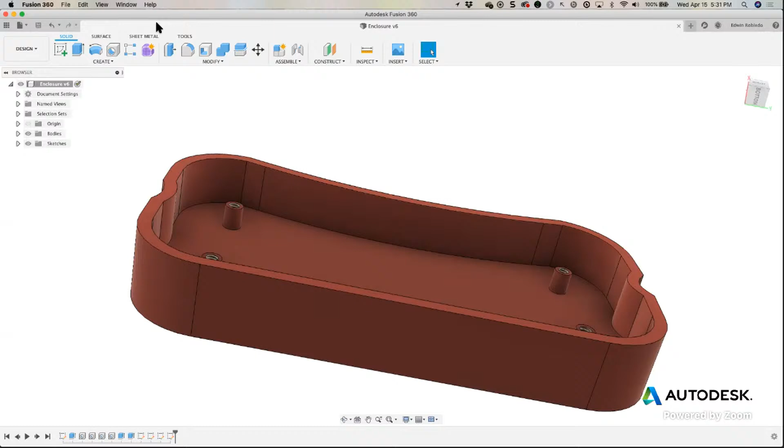I'm going to show you this example really quick, so you could see this workflow where I'm primarily using the fact that the PCB enclosure is actually leading the circuit board design shape. So I'm capturing the enclosure and taking that over to my circuit board.

How does this process usually begin? Let's say this is just your standard enclosure. I tried to create something with a couple of odd corners, because drawing this in the circuit board 2D PCB wouldn't be as easy, even though we do have splines implemented. But how do we transfer this data exactly what we need from the enclosure over to the circuit board? It's best to be as accurate as possible.

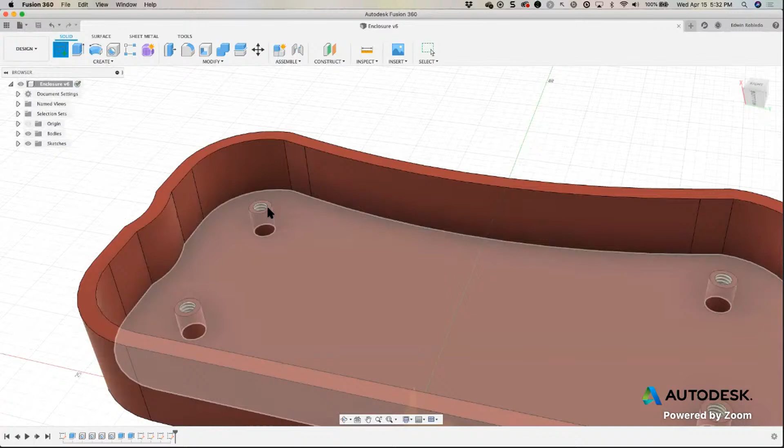The process starts using Fusion 360. I'll select that I want to create a sketch. The first thing that's always asked when you generate a sketch is on what plane you want to draw it on. Since I want the circuit board to sit on the standoff, I'm going to select this plane here. With that selected, I'll click Finish Sketch. I just wanted to set up the plane.

Now, with the plane selected, I'm going to go ahead and click Create PCB.

Hey Ed. Yeah, something happened on YouTube. Let me see. Okay, no, it's okay. I stand corrected, but I said it was just behind or something. Continue. Okay, very well, George. Thank you.

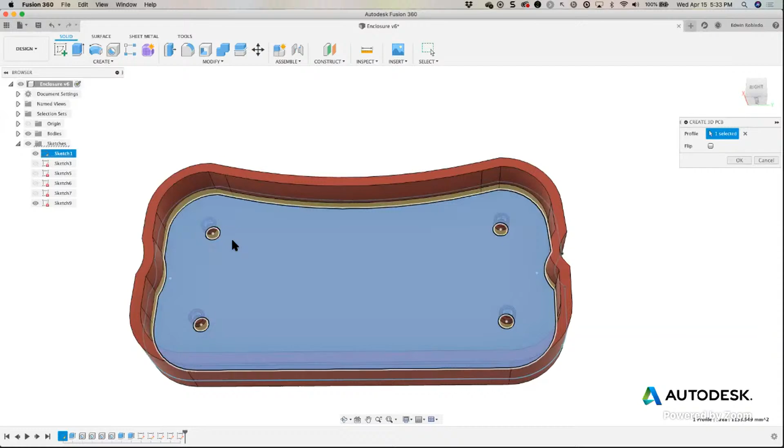Okay, so now I click on Create PCB. Now I'm going to select the profiles that I'll actually be using for my PCB. I'll select this profile we have here, which is going on this plane. But I don't want the entire standoff to come through, only the small part of the standoff, so let me select these portions here.

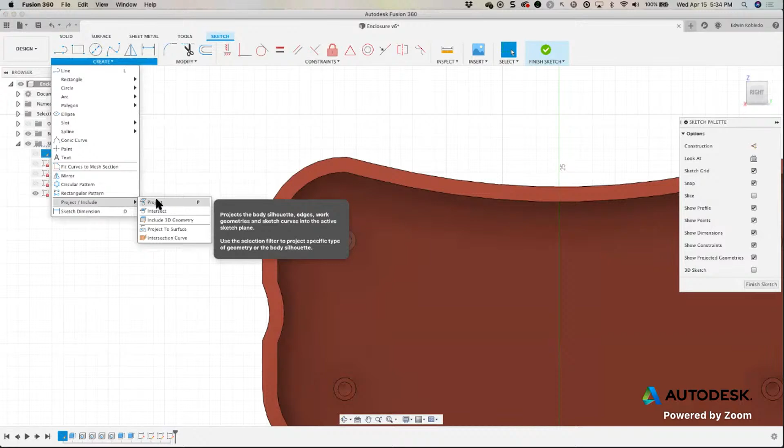One second, let's go ahead and cancel this out. I want to project this bottom here. This is the projection I want to do.

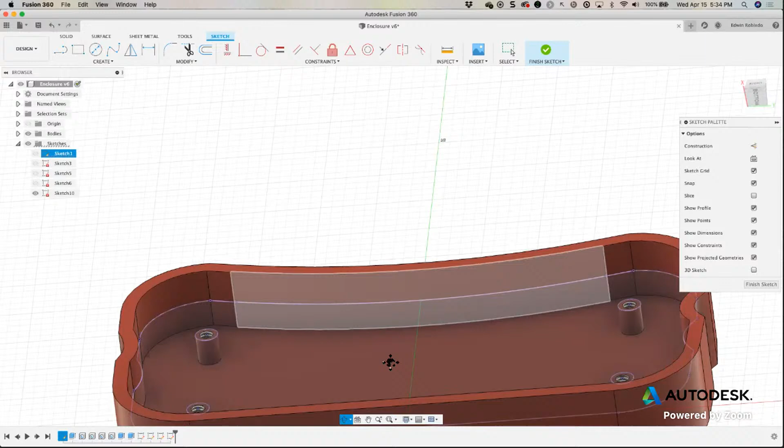So that's my projected sketch. I'll finish the sketch for now, and then click on Create PCB. Now I'm going to select the profiles that I actually want to project for my PCB. I select that one there, and I want to select these — I only want the outline of the hole of the standoff.

I had to change resolutions because it wasn't allowing me. It was a little easier when I was using a higher resolution. It's selecting the entire body, which I don't want — I only want to select specific parts. Let me go ahead and try this one more time. Let me edit my sketch.

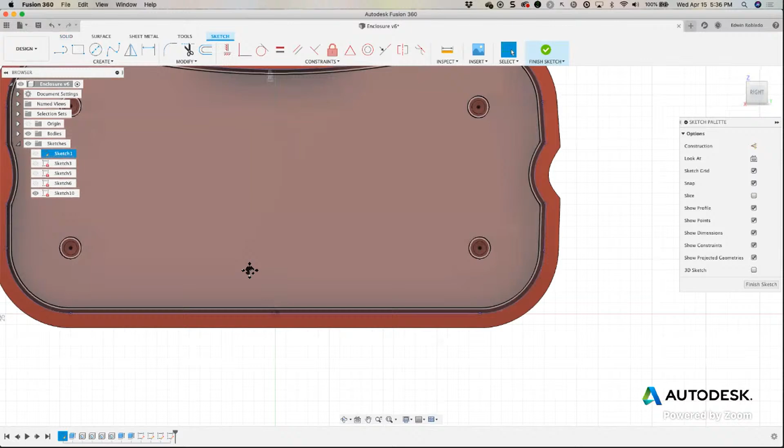Let's go ahead and project one more time, so that I only project these bodies here that I want. I only want these outlines — that's what I want projected as well.

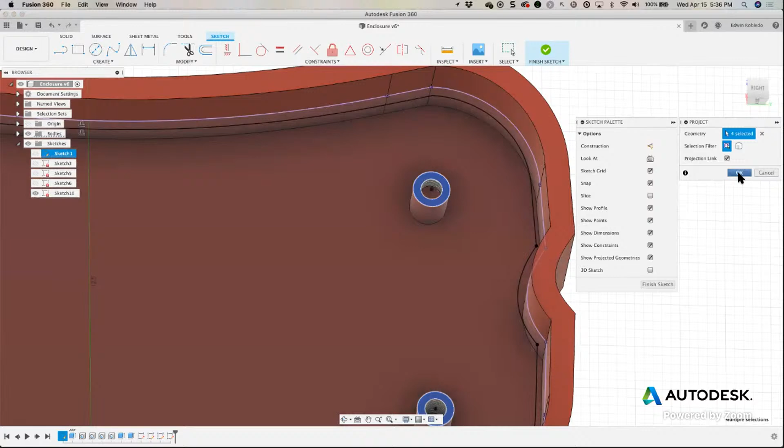You know, George, we always practice this many times, and when you go live, it's just the way it happens. Okay.

You're saying to click and keep the button down until the submenu appears, where you select the profile you want. Okay, perfect, will do.

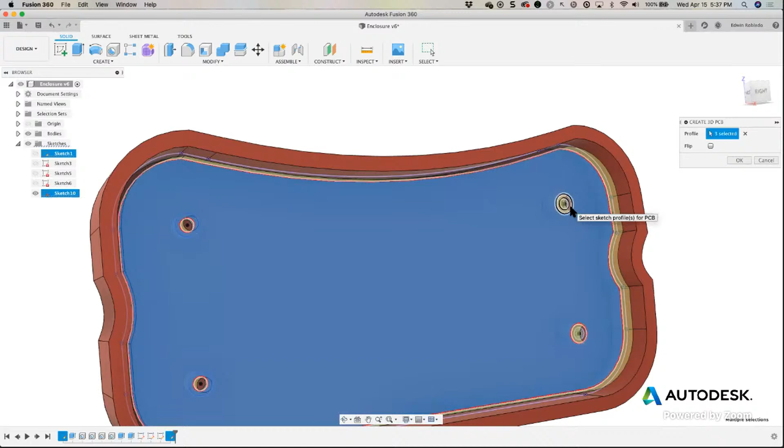There it is — so here's our circuit board. As you can see, what happened is I went from the profile, after capturing it and creating the 3D PCB, it created what's called a 3D PCB. So now we have the circuit board, and you can see that it automatically adopted the contours that I had on that circuit board.

To draw this on the 2D PCB would be a bit of a challenge. Therefore, by just projecting the outline, this makes it a lot easier. Let me just go ahead and show what we have so far.

Okay, I'm going to be using this on my circuit board. Let me go ahead and create a brand new electronic design. I always start with an electronic document. The importance of the electronic document is that it ties everything together - it's what keeps the circuit board, the schematic, and the 3D PCB all working together.

From here, I'll go ahead and save what I've done so far. It adopts a name, electronic design. I'll create a brand new schematic, and I'm just going to add a couple parts here. Nothing fancy - just adding parts, no connections, for time's sake.

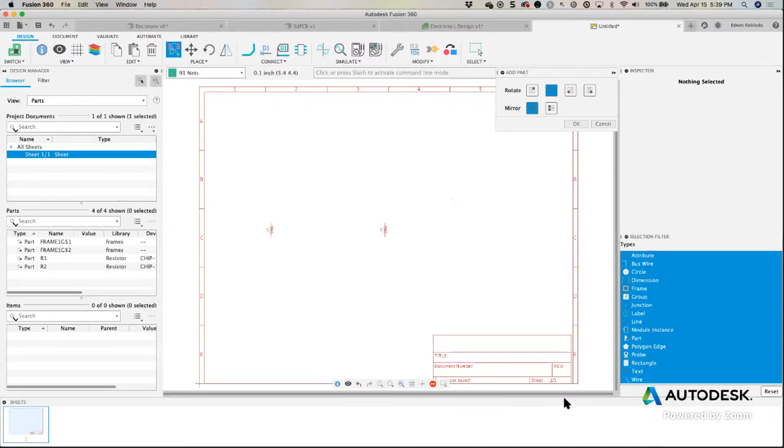Go ahead and create a circuit board now. Notice I just created the schematic, and I'm going to move over to the circuit board. You notice that by default we get a board outline, and all my components appear on the left-hand side. I can just start grabbing these and putting them inside the circuit board - this board outline that we have here.

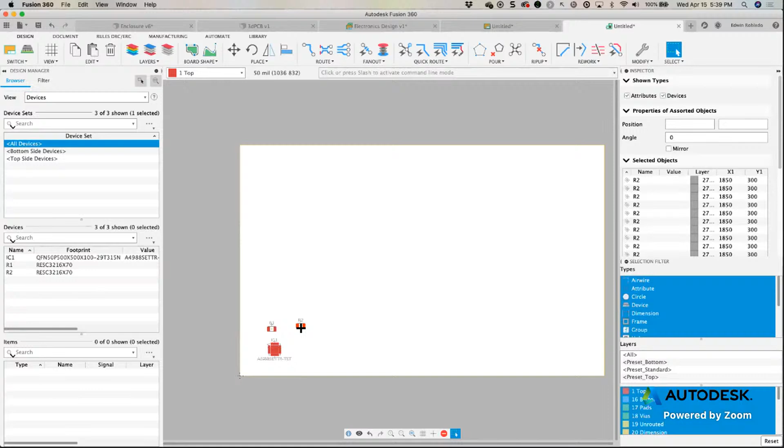I'm going to right-click one of them - the largest one - and mirror it. Mirror means that it's just on the bottom side of the board, that's all it means. So we have the two resistors on the top and one component on the bottom. That's all we have so far.

Now I want to use the outline that the mechanical engineer actually was using, that he used for the projection. Let's look at how we would accomplish that.

Let me save what we've done so far. I like saving from the electronic document - you don't have to do it from there, but I just like it because it cascades it all completely over. As you can see, all the dirty files become clean files.

Now what we want is for the circuit board to actually use the outline we created from the projected enclosure. So I'll go here and link this - I'll click on link to PCB, and select the PCB that we created, which is this one right here. Now I want to link this one, and I'll click on select.

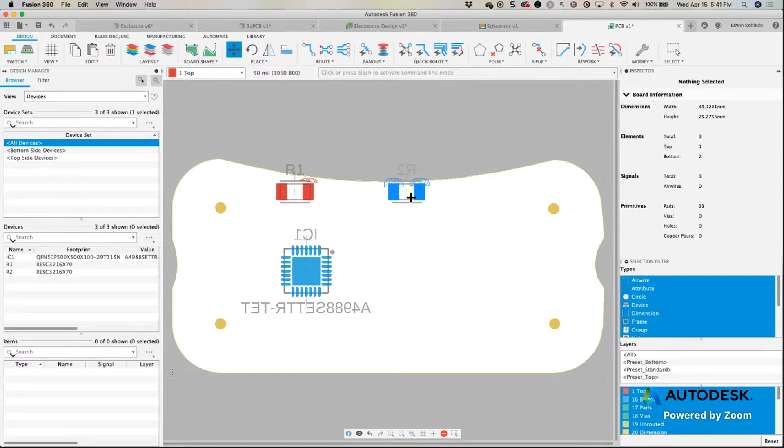Now you notice it was that easy - I didn't have to do any type of file conversions. I'm getting those hatch marks because I got a DRC error. I'm just too close to the board outline, so it's just letting me know.

Now let's go ahead and have the 3D PCB synchronize with the 2D PCB, which actually has components in it. As you can see, in the 2D PCB they put these holes and lined them up correctly with the enclosure. The mechanical engineer would have to give me those coordinates or some sort of file so I could import that and get the location of those holes. With this method, I just projected everything and then came over here and they were already there.

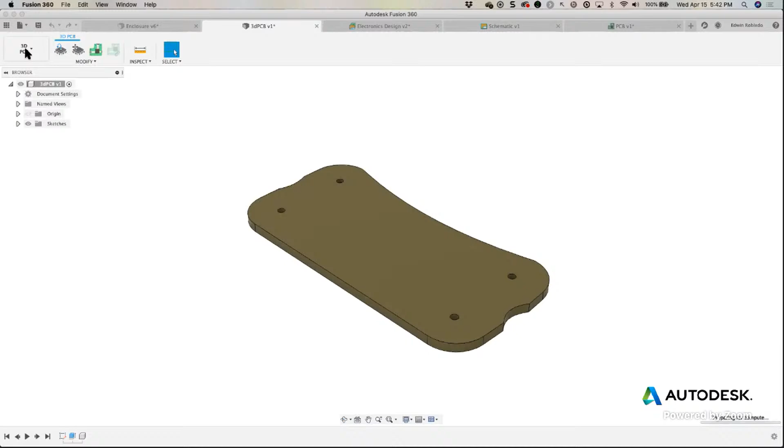So let's go ahead and move this over to the 3D PCB. We have this icon here that says View 3D PCB. When we do this, the 2D PCB is going to send all of the information to the 3D PCB, and it's actually going to catch up for us.

As you can see, I have the two components on the bottom side, which are the two that I have here - they're shown in blue. I have one in red, which is the one here on top. Let's go ahead and save what we've done so far.

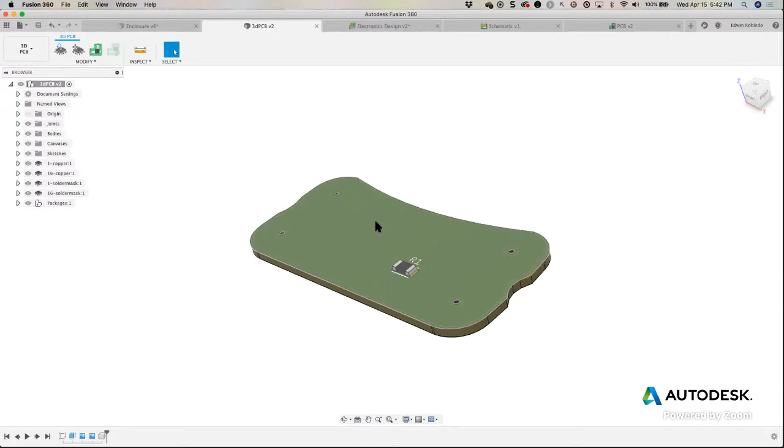Now, the question we've gotten often, Jorge, is like, how do I insert this into my enclosure now? It's something we want to improve on and will be improving - it's already being worked on, but I'll show you the method we currently have.

So let me go to the enclosure we currently have, this one right here. Save what we've done so far. I'll turn off all the sketches - I don't need the sketches anymore, I don't need the sketch profiles any longer.

Now what I'm going to do is take the 3D PCB, which is this one we're working on right here, and just right click it and say that I want to insert it here. As you can see, it doesn't line up so well - this is something we're currently working on.

So let's go ahead and rotate it 90 degrees in that direction. Let's rotate it 90 degrees in this direction.

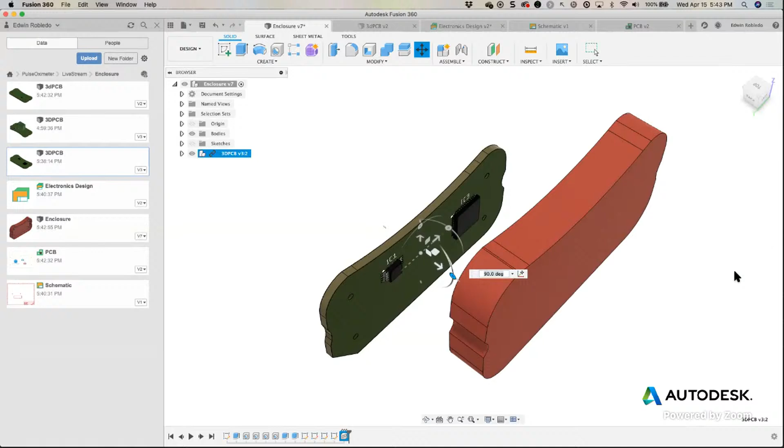Okay, I'll click OK. I'm just going to use the joint function, hopefully I can get it right this time. I'm going to select right here, the center of this hole.

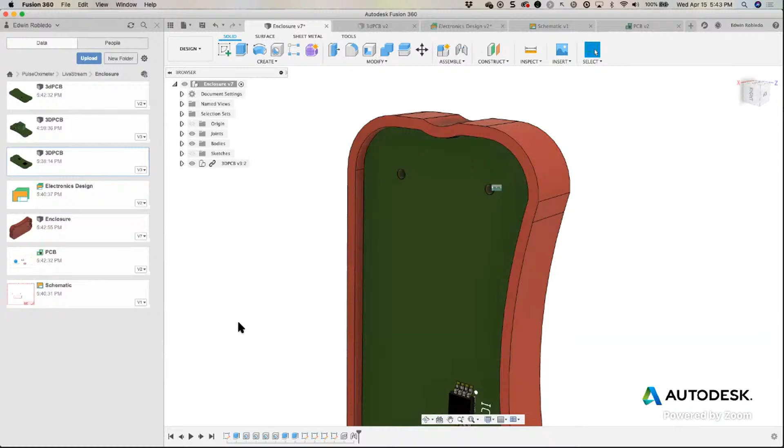Center it right here. Okay, and click OK. As you can see, I was able to fit my enclosure, pretty straightforward.

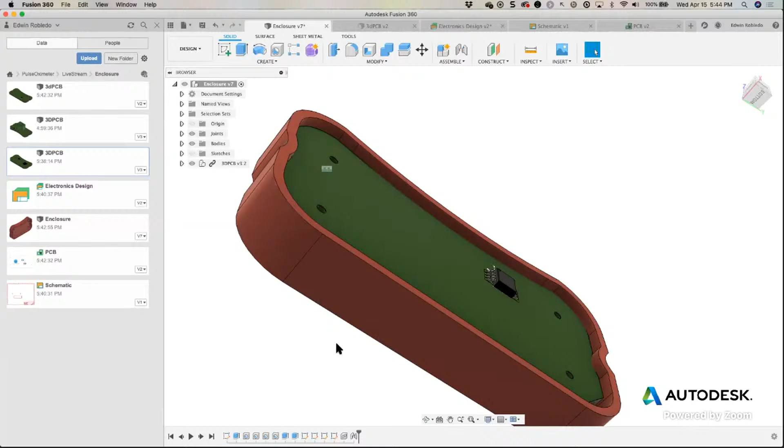Now, the question we've gotten in the past is, how do I move components so they reflect on the enclosure? For now, within the design realm, we're not in the design workspace, so we're not able to move components here yet. That's currently being worked on, but you can move components in the 3D PCB and they will actually reflect on both ends.

So I'm just going to take this component here. Actually, I'm going to go ahead and separate my screens so you can see this in real time.

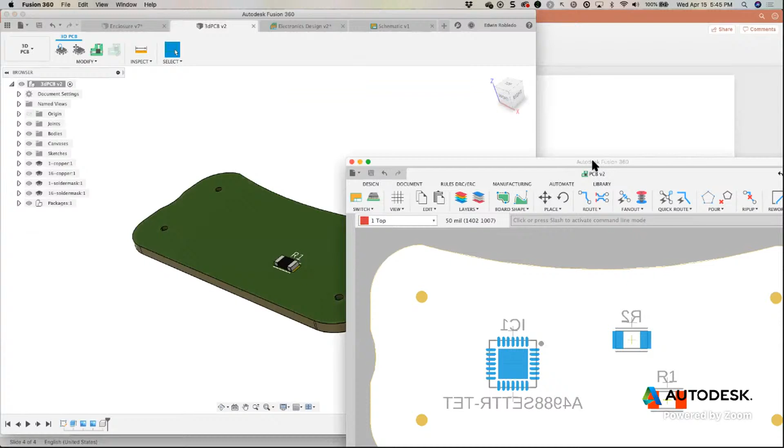So I have the resistor one, as you see here, which is right here as well. Okay, now I'm going to go ahead and move it. Let me make this screen a little bit smaller, shrink it a little bit more.

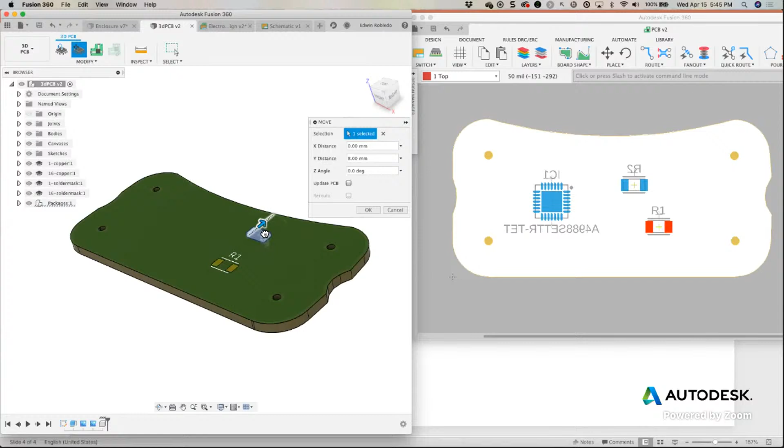So I'm in the 3D PCB. I'll click on move, select this component, and move it. Click OK. Actually, what I'm going to do is take this IC that's on the bottom, select it, and flip it over to the top. You see we have that mirror option there. Flip it, put that on top, and click OK.

Now I want to synchronize between the board and the schematic. You'll notice the R1 is actually going to move, and the IC1 is going to be switching layers. Let's go ahead and do that synchronization.

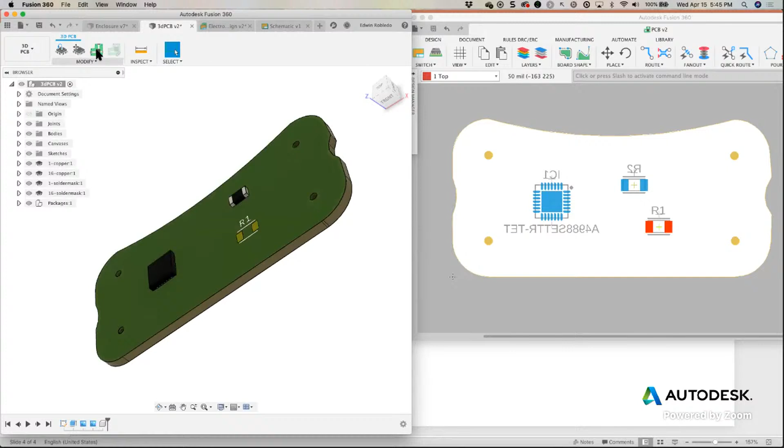So I'm going to push the 2D PCB. As you can see, the component moved - it's pretty fast the way it works. Now we need to push back to complete the synchronization cycle, back to the 3D PCB. So I click here.

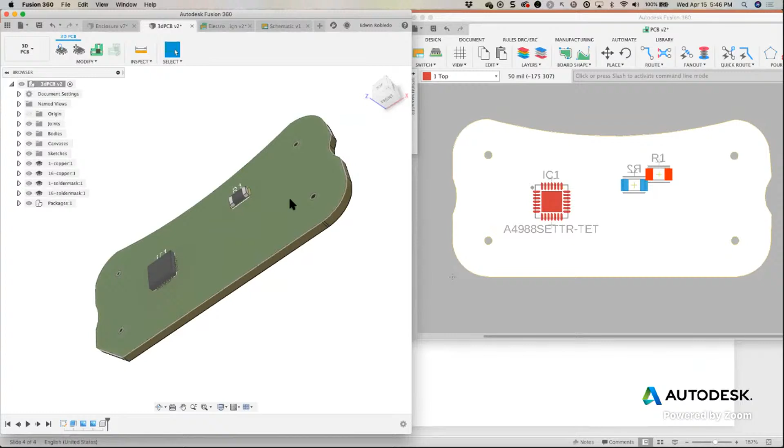Okay, as you can see, it actually updated, so now everything is synchronized. I have my IC and my resistor on the top, which I flipped to the top, and my other component, the R2, is now on the bottom all by itself.

Okay, now what happens on my enclosure? Let's take a look at what we've done so far, and make sure the enclosure is actually catching up. You'll notice that the enclosure is actually dirty - you see that little asterisk right next to the name? It's just letting you know it's not saved.

I'll give it a minute. Let's go ahead and save so far.

I'm waiting to see if we're getting a synchronization notification right here, letting me know that there's been some updates on the 3D PCB that need to catch up.

I did this like 10 times today, it was working pretty good. So let me save here. See?

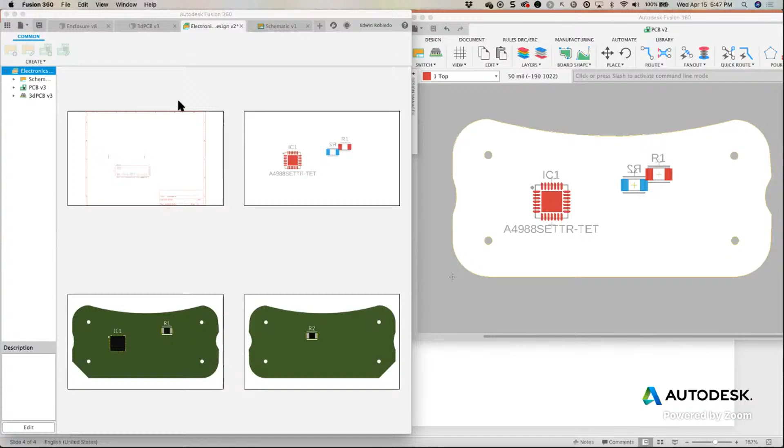Okay, well, I've got to find out why it's not working.

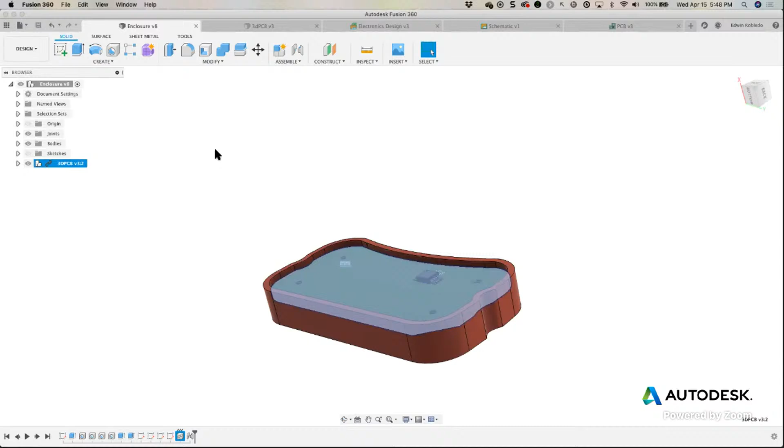Hey Ed, Aaron is saying that maybe the out-of-date icon is being hidden because the window's too small. So the tiny chain icon with the yellow triangle, that's the one you're looking for, right? Yeah, yeah.

When I did it earlier today, it actually did come up, so not sure what's broken, that it's not catching up with it. Not sure what happened - make sure you have everything saved, which it looks like you do. Yeah, everything is saved, everything should be looking good. Not sure exactly, everything is linked, everything is properly linked. So let's try one more time.

So let me break this link. Thank you, Aaron, for being here. Appreciate it. I hope everything is doing well.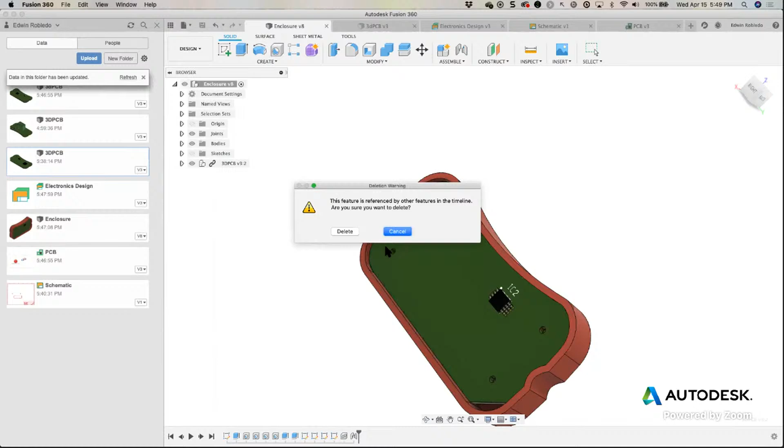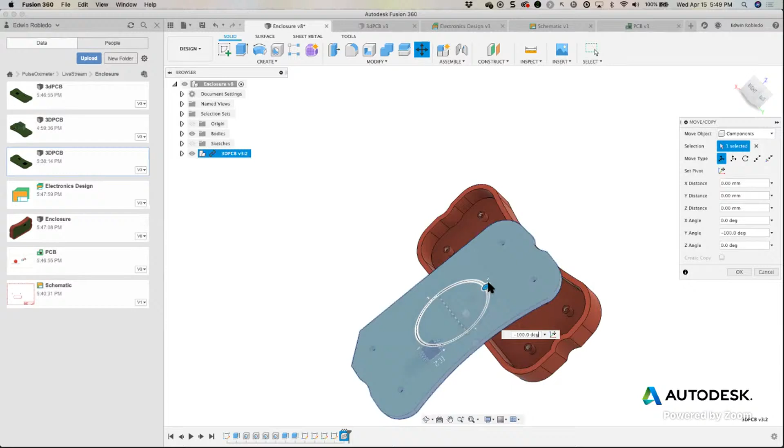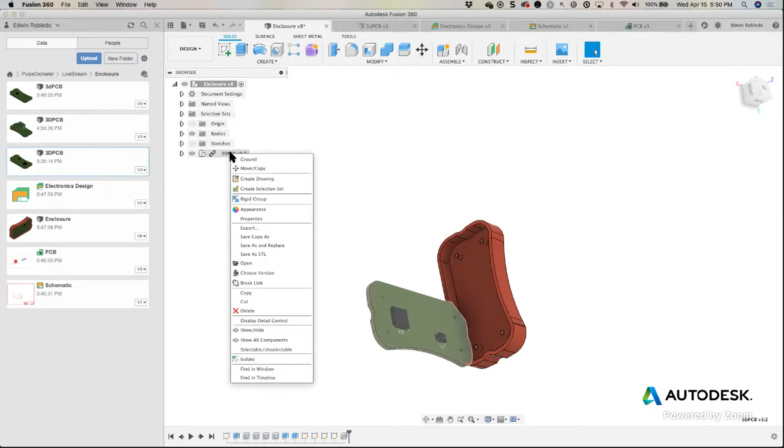The idea would be that once you actually catch up, it would just show up here. Let me try it one more time. It's kind of strange because I did this many times today before the presentation, and it was actually working pretty well.

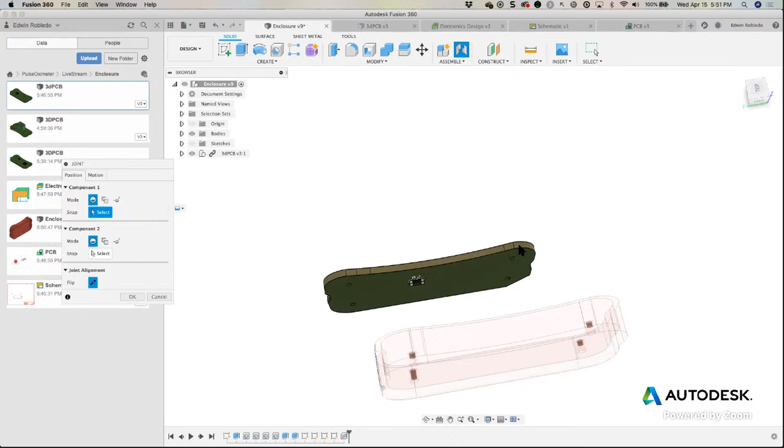So let's go ahead and save what I've done so far. Okay, insert into current design.

Okay, so it's actually catching up the 3D. I moved them one more time. I got to go to the 3D PCB. Let's try this one more time.

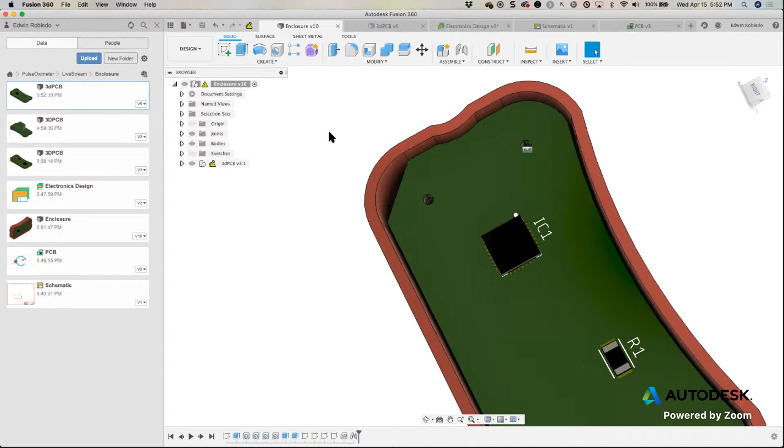There it is, okay, this is what I wanted to show you right there. So any modifications you do to the 3D PCB, when you push them over to the Fusion 360 design workspace, any modifications will come up, alerting you that there's been modifications that need to be synchronized. So I'll click here and it will update the circuit board, which is this body we have right here. It will disappear, letting me know that that's synchronized.

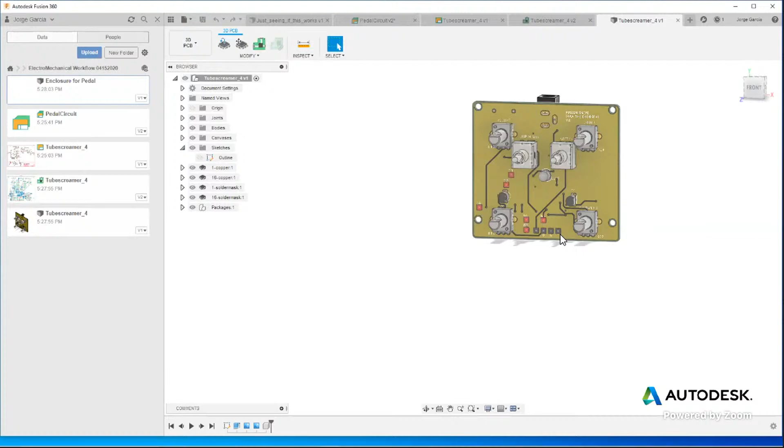So right here we have a PCB design that's already done. I'm going to go ahead and click View 3D PCB, and here's the 3D PCB for this board. It has most of the models assigned, in fact it has all of them, memory serves. Just for those music fans, this is a guitar, this is a pedal. Okay, so everything is assigned.

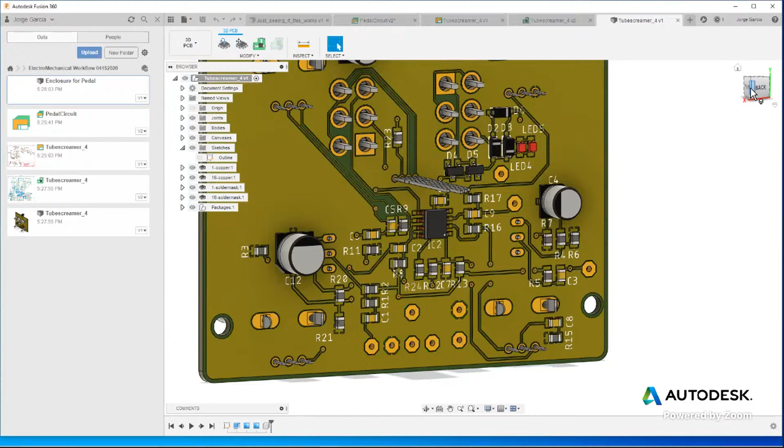And what we're going to do is use this to kind of drive the enclosure. So what I'm going to do is create a new file, and what we're really going to try to do is just kind of work out the outline first. Okay, so I'm going to go over here to New Design. I'm going to save it.

Because we're going to use the insert derive workflow. Save. Okay, so now I'm going to go to the insert menu and select insert derive. So what this lets you do is bring in sketches, bodies, geometry, etc. from another design and use it as reference material in this one. So I'm going to click insert derive, and select this file, which is the one I want to derive from.

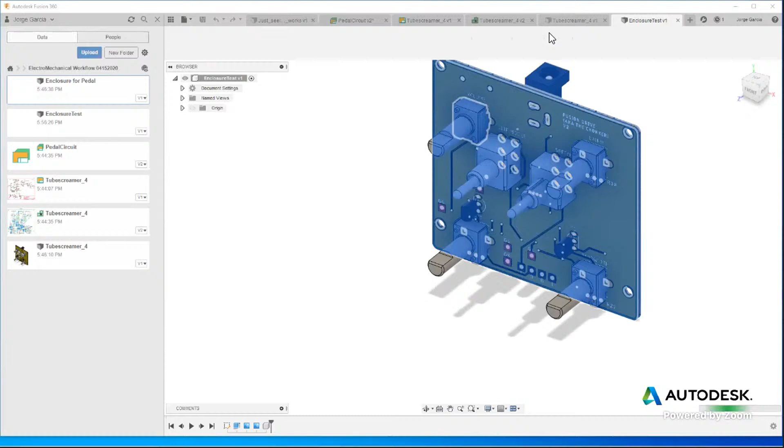Hit select, and what's going to happen is it's going to take me over to this file. It's going to ask me what do I want to derive. Okay, so I can clear the selection completely. I'm mostly interested in the sketches, so I'm going to go into sketches, I'm going to say the outline, and that's really all I want. Okay, so I'm going to click OK.

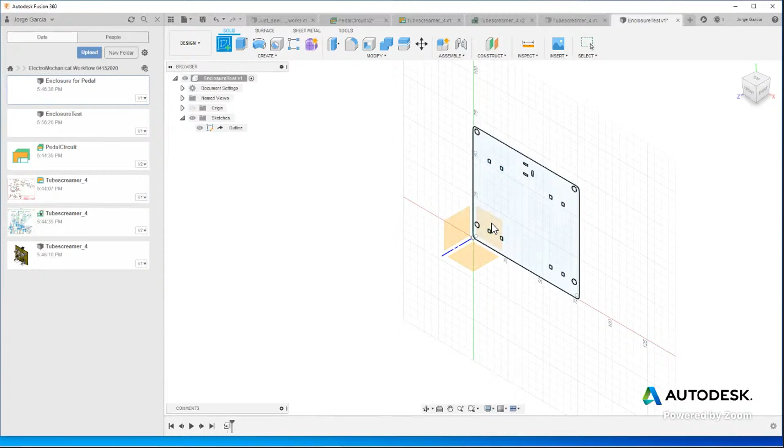Once I do that, it's going to take me right back to the file. The sketch is not visible right now, but it should be here, and you'll see that it's been brought in, it's derived. Now at this point, what I can do is use this as the basis for driving an enclosure. Now let's say I was going to make a really tight enclosure, what I could do is go ahead and draw a new sketch. Okay, I'm going to draw on that plane, and what I'm going to do is go ahead and project this one.

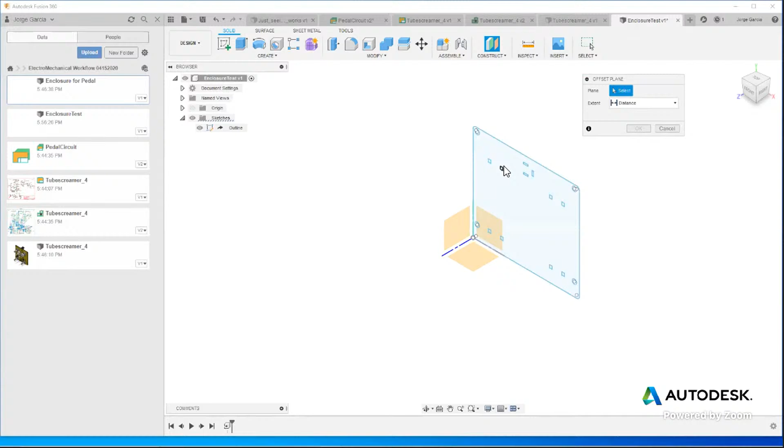Let me escape this real quick and delete this. I need to put in a plane first. Delete, okay. So what we'll do is construct an offset plane from here, and I want it to be 3 millimeters.

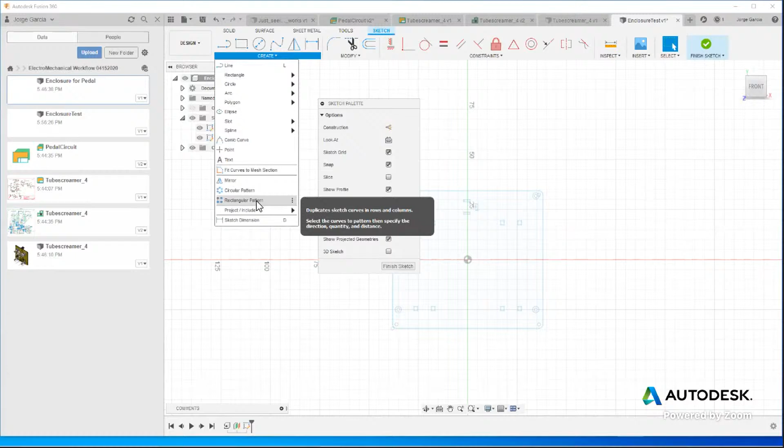Let's do 3. Okay, now onto this plane, I want to project the main outline and the 4 mounting holes. So I'll go create a sketch. I want it there, and then I'm going to project. The things I want to project are just this one, this hole here, this one. Nope, not that. That. There we go.

Let's take off anything that I don't need just to be safe.

I just want to bring up the fact that what Jorge is doing now is the circuit board is actually going to lead the size of the enclosure. We got a lot of new people in, Jorge, that's why I want to bring it up.

Okay, so this is everything I want to project. Specified entities, projection link, say okay. Good.

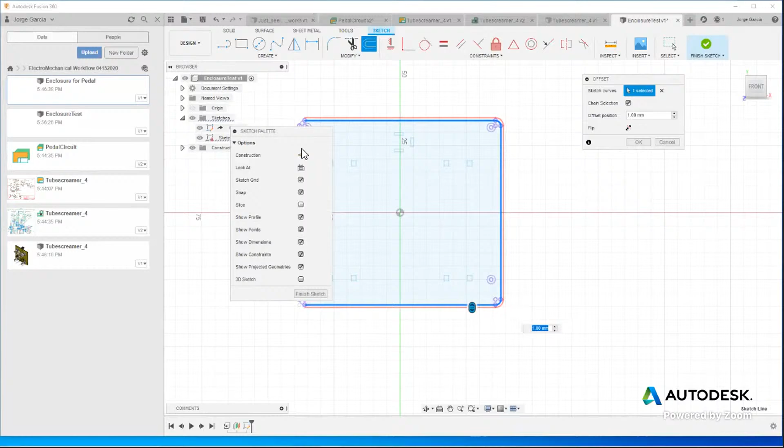So now from that, I'm going to finish that one. Actually, no, I wanted to make a further edit to it. Edit sketch. What I'm going to do is draw an offset curve. Did I get it? Yes, I did. Okay, and I want to give it 2 millimeters just to give some good room. Nope, not 200, 2.

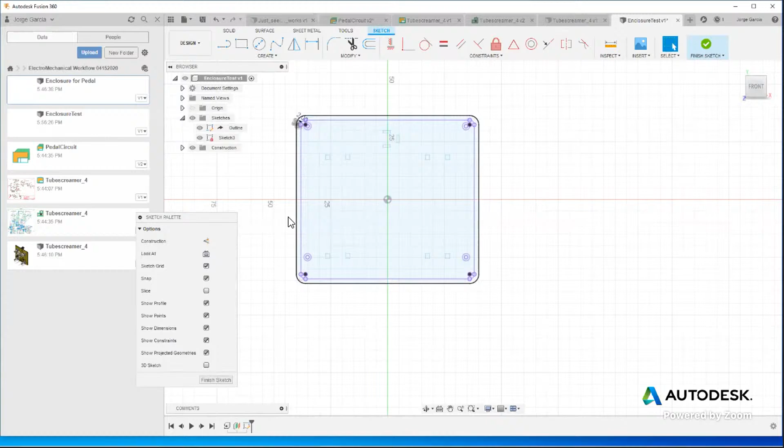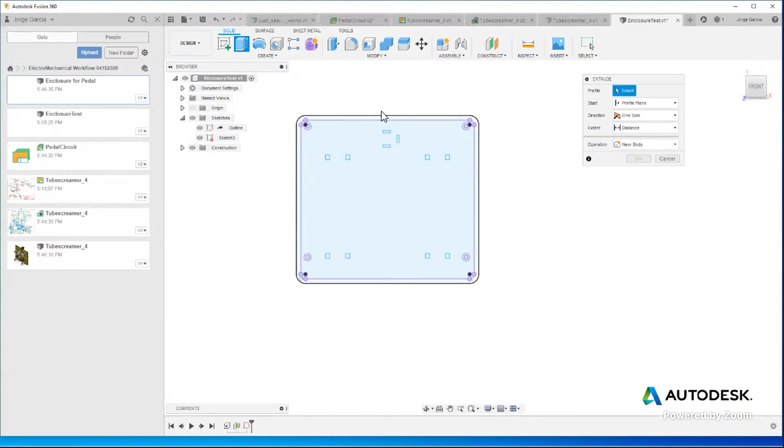Okay, perfect. So now we formed the sketch, 2 millimeters, and what we're going to do is shell this. I'm going to finish the sketch here and go ahead and go to extrude. Actually, I'm just going to do the extrude first. I want to select that profile. Okay, and I'm going to go ahead and pick, let's say, 10 millimeters to one side. Say okay.

Now from here, one thing we want to emphasize is this is linked, because of the insert derive workflow, to the PCB, to the 3D PCB, and to the original 2D PCB. So if I make a change here and save it, you're going to see it go downstream. That's really the key part we want to highlight with this workflow.

Is there a question, Ed? Somebody put something up? No, we're good. Some of the guys are talking among themselves there. Oh okay, yeah, if they got tips I'm all ears. I'll let you know.

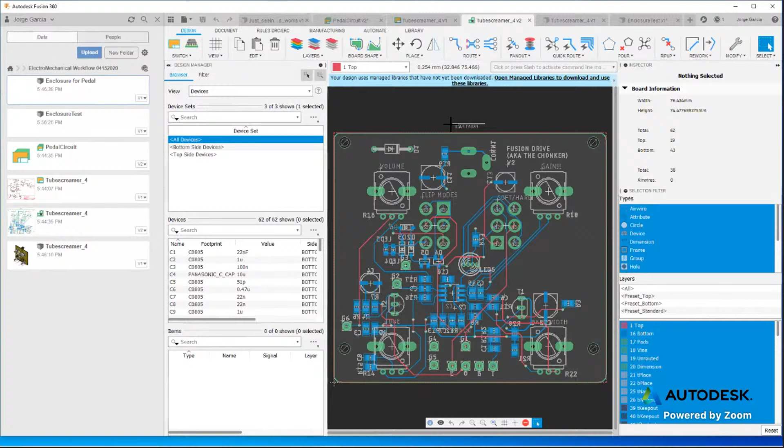All right, cool. So what I'm going to do is make a change. I'm going to save this one first before we continue. Let me bring this up. Maybe you could just close the data panel so we get a little bit more of what you're working on. Okay, there we go.

Okay, and now I'm going to go over here to the PCB. I'm just going to make a big change, something ridiculous. Old habits die hard, I know. Always trusted command line. Let me do something different, something with the miter, that way it's not so drastic.

Okay, so we can all tell that I've made a very drastic change there. I'm going to say okay to that. I'm not going to save it.

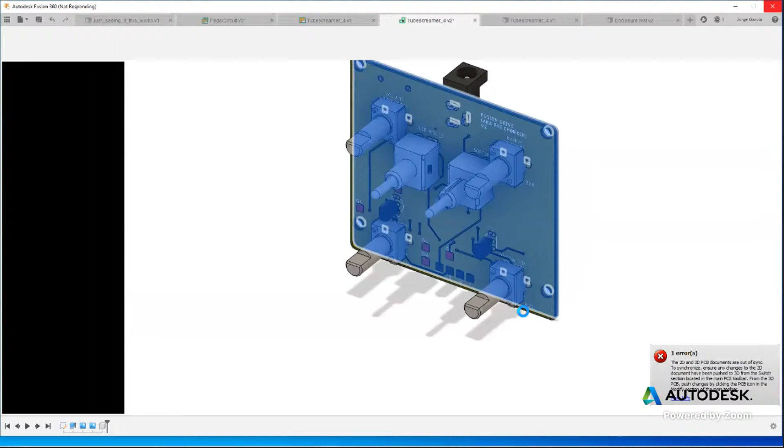Always good to write changes. Okay, let me sync it first. Okay, so now it syncs. You'll see the big curve show up over here. Give it a second. Still going, there it is.

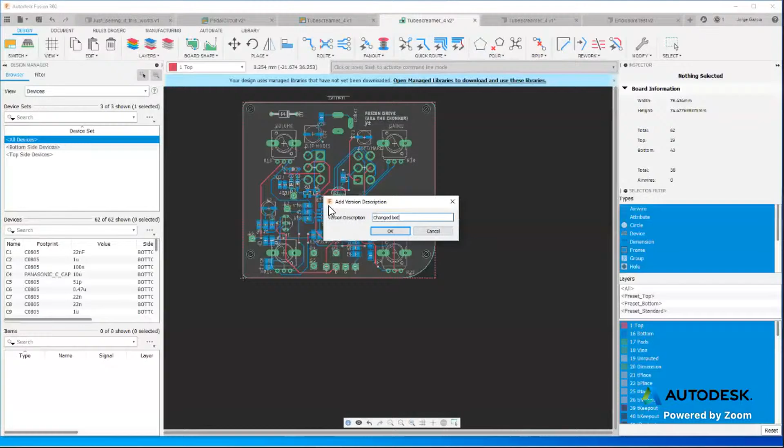Okay, so now I can go over here to the 2D PCB, I can save it. Okay, it'll be saved. Now this one should be saved as well, there's the change it took, yep.

And now if we go to this one, yeah, we could see the change there, Jorge, as well. You guys see, get all latest. So now if I click here, you'll see that this propagates the whole way through. And now I have yellow, which I know is not good.

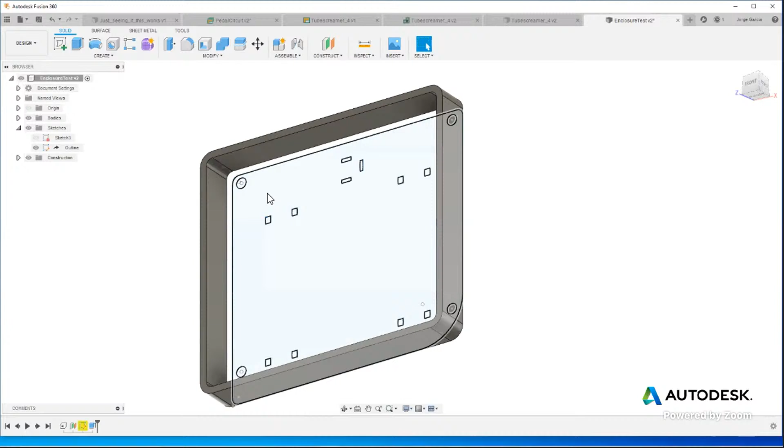How do you fix the yellow, Ed? Because I got this one here, the derive came in correctly, but now the sketch didn't update. It says it's locked here. Wonder what happened there. See, because it came, and the derive came, but then this downstream sketch didn't.

Redefine sketch plane, ah, that's why. No, it's not that, okay. So cancel that.

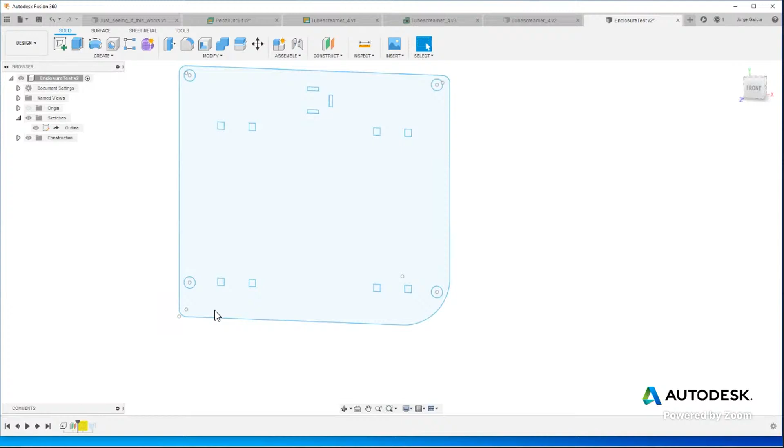Project source is lost, so I guess it's because I used it as a projection.

Jorge, can you hear me? Yeah, I can hear you. So apparently the platform we're using to broadcast cut off entirely—it shut down and came right back up. Okay, so YouTube is catching up.

So do you know how to fix this? It went yellow, and you'll have to share your screen one more time because we lost it. Okay, let's see—can you see it? It came back. Yes, it did. Okay.

So I guess the fact that I changed this curve and had done it as a linked projection, it didn't like it. What I should have done is maybe just built around the derived model, but either way, I can edit the sketch.

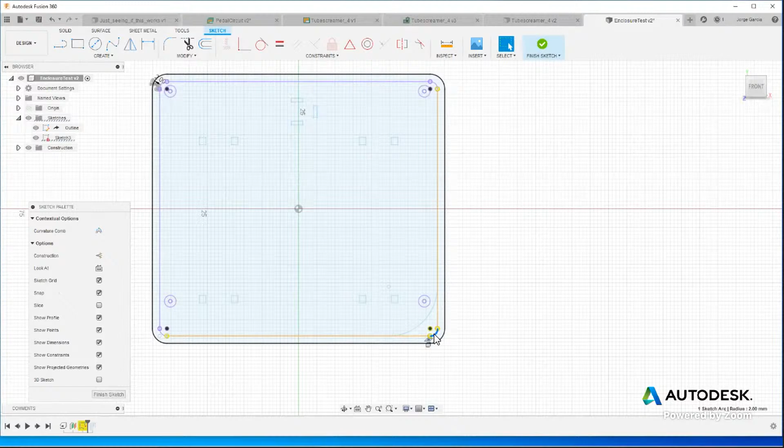Okay, so let me just do another projection. Then what we can do is that'll be the sketch that we want to use for the extrude.

So if I say finish sketch, does it change anything? No, it does not. Oh, because I have to redo this part of it too—that's why.

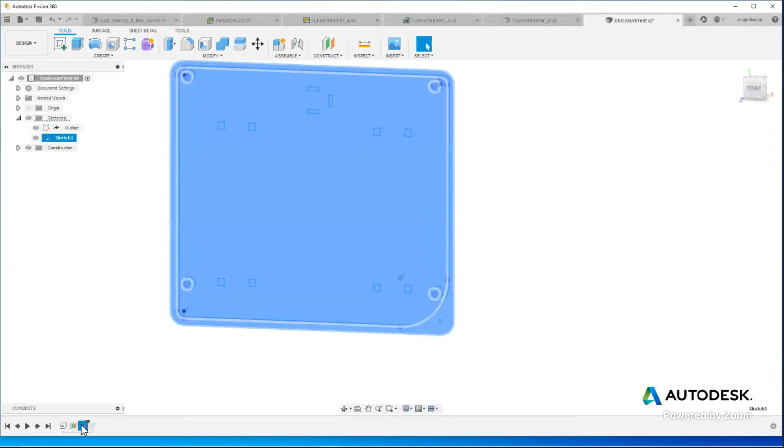So, note to self: projection is not the best way to go for this. Probably not doing this in the best way possible, but okay. Now if I say finish sketch and take it to the other side—yep, same issue.

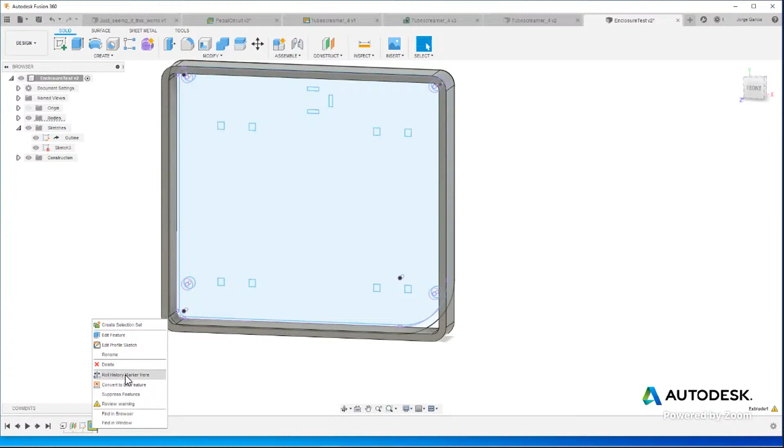So basically the way I did it was not the best way. Delete. Okay, it was supposed to automatically update, but I guess the way I defined the sketch and profile was not the best.

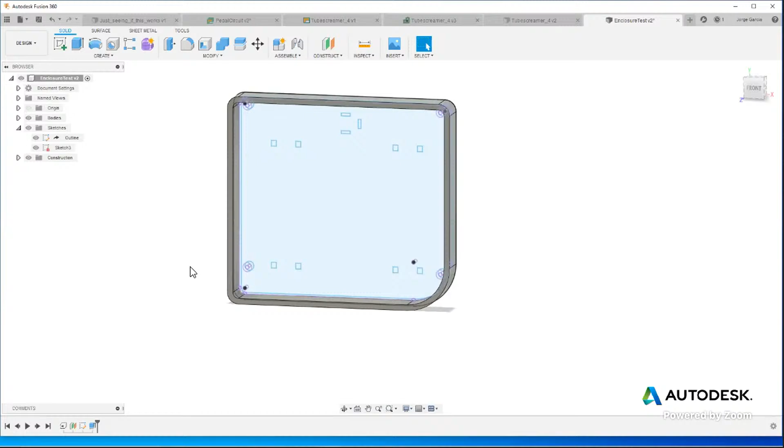But that would be the basic idea—it allows the changes to transfer across to the enclosure part. And as you make changes, assuming you don't do them with projection profiles like I did, everything would keep track.

Do we have any questions or suggestions, Ed, on YouTube? No, not yet, but there's one more fact I wanted to show really quick. Go for it. Let me go ahead and load this really quick.

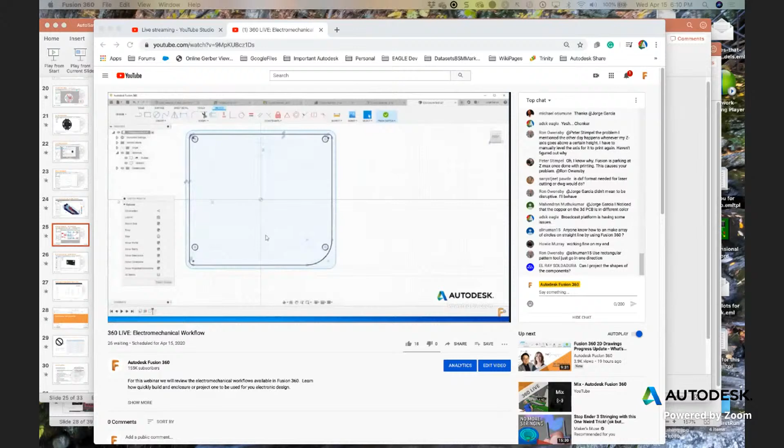The fact is, if you move patterns or components in the 3D PCB, it actually takes effect live with the 3D as well. So let me show that really quick—let me link these up.

When it comes to my internet performance, I don't know why, but it's not going as fast as I would want it to. It's all right.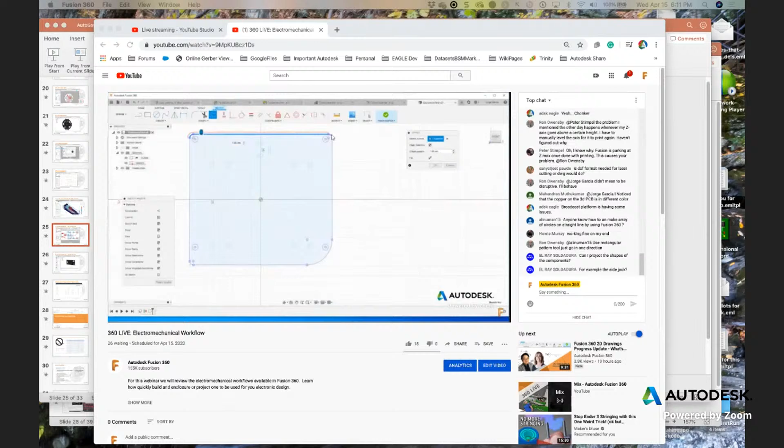Before we actually go show moving parts, it's come up often enough that users want to take a projected PCB in the 3D PCB, make modifications in the 3D PCB, and actually see the changes made there. There's a couple steps to do that, so let me show you really quick.

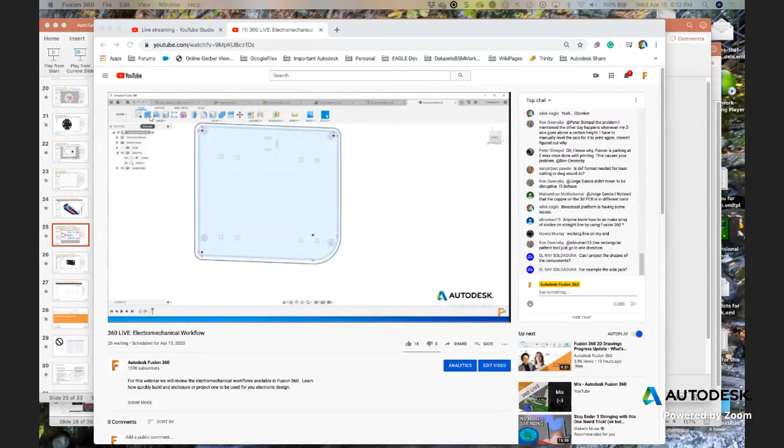It's loading, give me one moment. Okay, so if you've created a projection and a 3D PCB with an outline, but need to make modifications to that outline, the way you'd do it in the 3D PCB realm is—first make sure we have synchronization between our 2D and our 3D. As we see here, it's exactly the same.

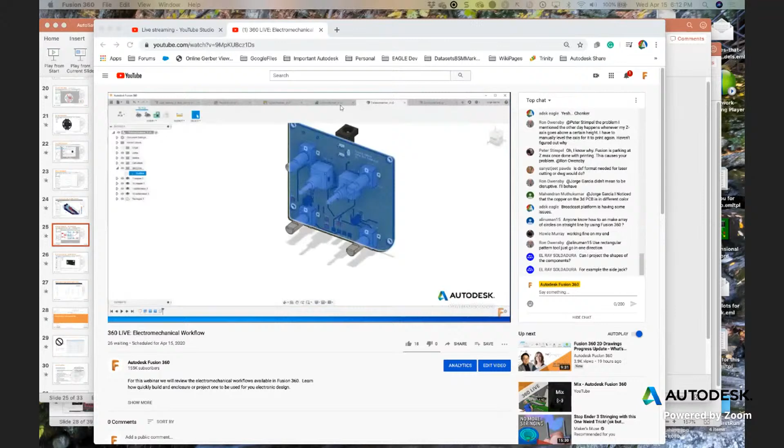So I'll make a small change here—right click where it says outline down there, select edit sketch. As you can see, there's my sketch, and let's do a subtle change, such as a fillet. I don't know what you're transmitting, but you're showing the YouTube page right now.

That's what you have shared. Okay.

Okay, yeah, this looks right. I'm going to cancel what I've done so far, because that means they didn't see what I had done earlier. So let's do this real quick—I'll set this up again.

What we're trying to do is make modifications to the outline of the circuit board in the 3D PCB realm. In the 3D PCB editor, I'll right click and select the option sketch, as you can see here. Now I can see the outline.

Let's go ahead and do some fillets on this corner. Let's make it very subtle—we'll do it at maybe 2, just a very subtle change. As you can see, it was square there. I'll do the same one over here and set it to 2 as well. So I made some modifications there, and I'll click Finish Sketch.

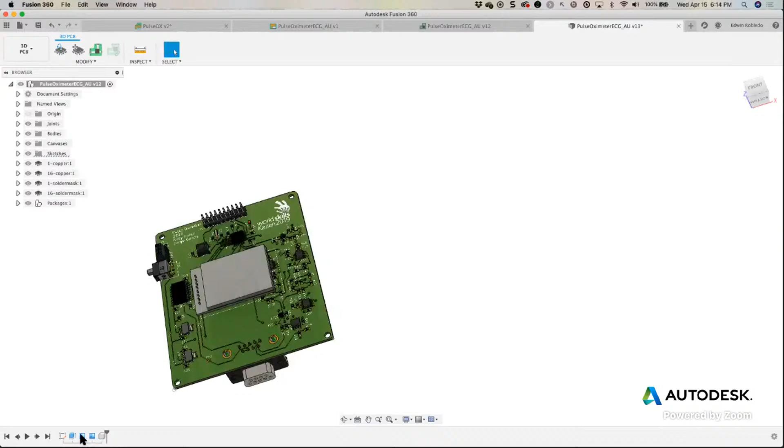Now there's one more step you need to do. I'm just letting it catch up, because you'll notice the board outline comes up square again—it hasn't adopted my corners yet, as you can see. So I'll do a right click on the extrusion and select Edit Board.

And now I'll click OK. Once I select the profile, once it refreshes, it'll have the new board outline that we have as well. Now we'll go ahead and synchronize the 2D PCB.

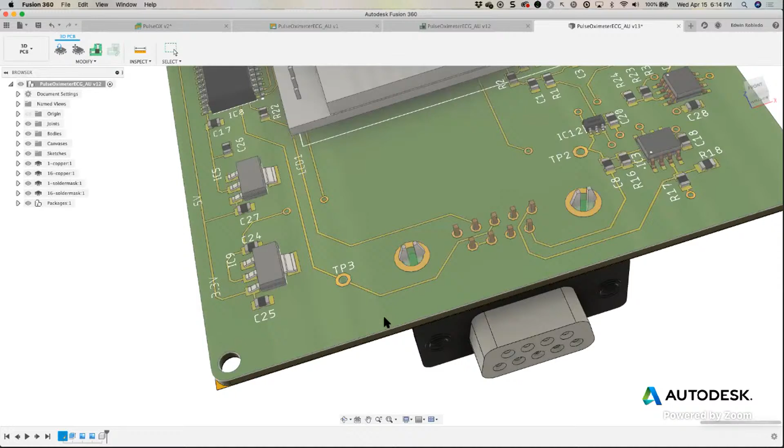You'll notice that now my corners, the only reason you're seeing that extra copper is because of the polygon. The polygon is out there, so let me just delete that polygon. I'll delete this polygon really quick here, and get rid of it there and here as well.

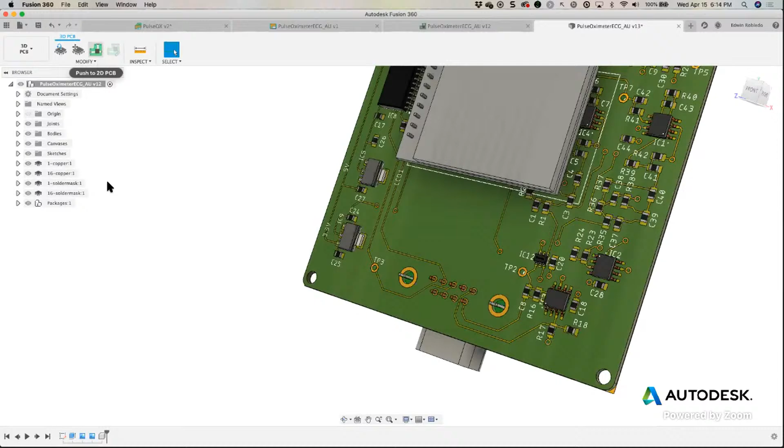As you can see, the modification that I did in the 3D PCB actually modified the 2D PCB within a matter of seconds. No file conversions necessary. Let me go ahead and save.

There's one more instance I want to show, one more change, fillet, bottom corners. I'm going to go ahead and split my screen one more time, so that this change I'm going to do now, you can watch it live.

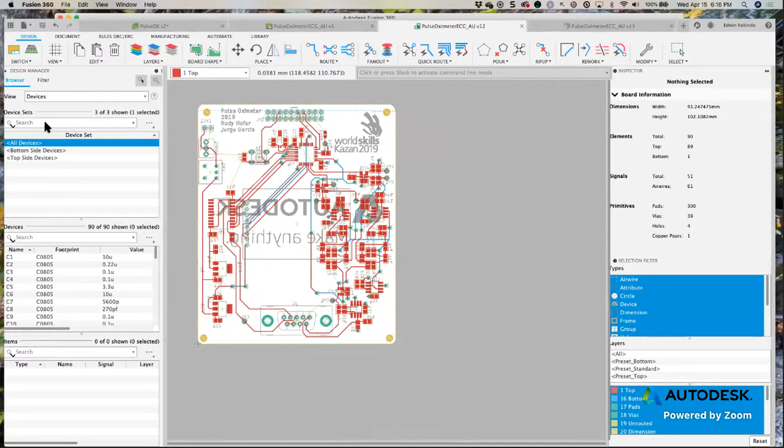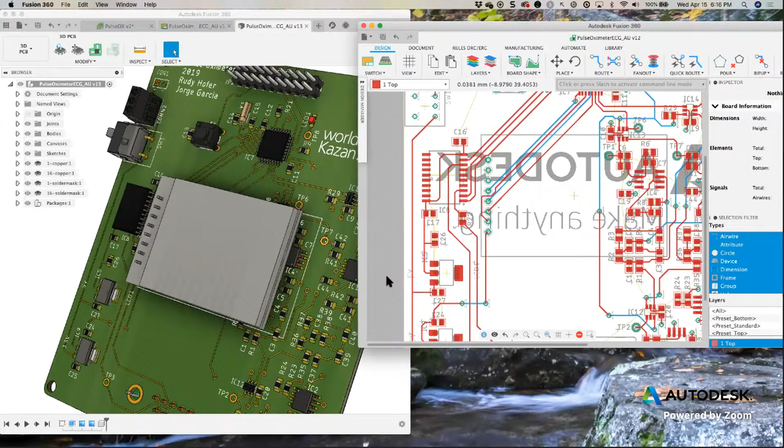So what I'm going to do now is just move some parts here. There's an option I want mechanical engineers, which many of you are, to see: I'm just going to move this component right here. I'll zoom in on it a bit, which is C43, this part right here.

So I'll click here. I don't want to flip it, I just want to move it. Let's say we move this down, and maybe a little to the right. Please notice that there's this option here, it says update PCB right here. So let's go ahead and click.

It's loading, sorry about that, it's just loading.

Please notice that when I select the asset, which in this case is a component, you have the option of rerouting, as you can see here. That's going to try to fix all this routing that we have and actually reroute it. I'll select that option and just move the component down a little bit and over. Let's move it to the edge of the board, even though it's some DRC violation. Let me just move it back a little bit and click OK.

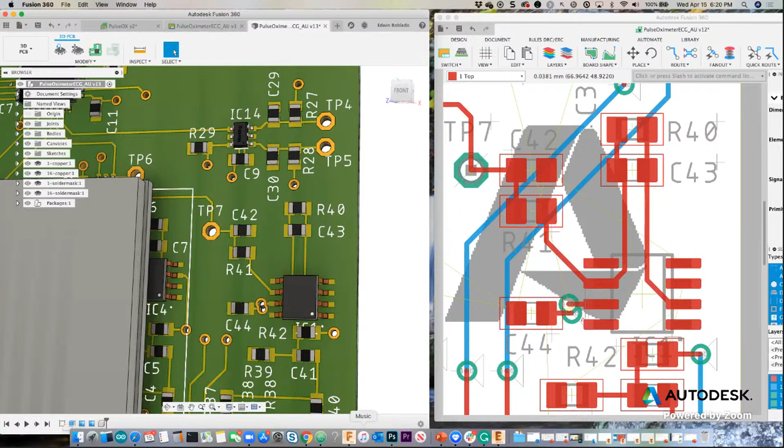Thank you for joining us. Everybody have a great day. It's been a pleasure, please stay safe. Hopefully everything is going okay for everybody. Bye, everyone. Thank you, Ed. No, thank you, Jorge, for everything. I greatly appreciate it, man. Bye, everyone.